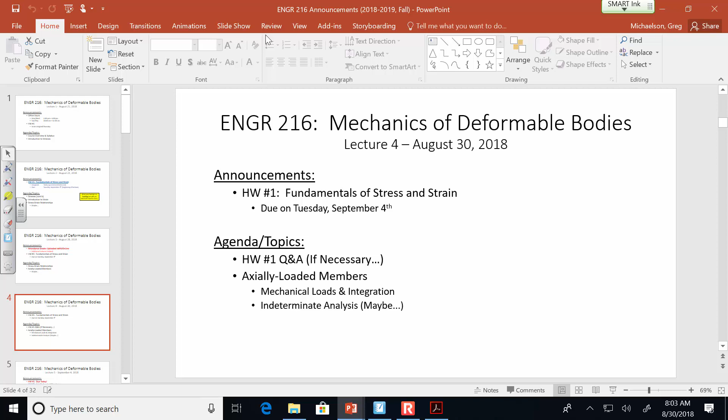So what we're going to do today is begin. We've basically finished our fundamentals in the class. We've got a pretty clear definition, hopefully by now, of what stress is, what strain is, and how they're related. What we're going to do is take those definitions and start to address typical types of problems that we deal with as civil and mechanical engineers. We're going to start with an axially loaded member, take axially loaded members, and just run the gamut with them. So I want to go through some of that theory a little bit.

We start with axially loaded members here because they're the easiest place to begin, since we've pretty much already derived in one way or another all of the formulas necessary to start attacking axial loads.

So what we do is basically say, all right, we start off with Hooke's law. We start off with our fundamental relationship between stress and strain. I already have some definitions for what stress is: stress is force per unit area. That was one of our first definitions of the course. And I know that strain is the change in length over the original length.

So if I have stress equals E times the strain, and I know that stress is P over A, and strain is the change in length over the original length, then I can just do a little bit of algebra and get that delta equals PL over EA. It's that simple—take this equation, multiply both sides by L, divide both sides by E, and there you go. I don't want you to think there's any magic in how I'm getting this relationship.

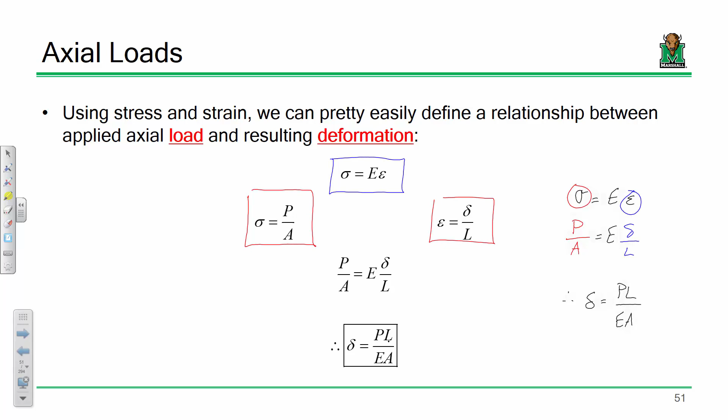So that's basically your four parameters that define how a member is going to deform when subjected to axial load. Now, one thing worth mentioning is that formula is very nice and pretty only if the load or the area is constant. So what if you have a bar that's tapered, a bar where the area changes?

Well, if the area changes, we got to break out the C word—we got to use a little bit of calculus, because we don't have deflection as just a function of some constants. If the area is a function of x, then the deflection is going to change as well. So more often than not, we would need to integrate.

Now, I want to show you something. This is pretty straightforward. All we're doing is looking at an individual element, and saying that individual element can have some load as a function of x, and some area as a function of x. So that's where we have this n of x and this A of x. Then all we're doing is taking that and integrating it over the length.

Now let me show you this equation real quick. What happens if we have a constant load and a constant area? If I have an integral from x equals 0 to x equals L, and I have a constant load—let's call that n of x, let's just call that P—and a constant area, let's call that A, how would I integrate that? Like, what's the integral of 7? Anybody? 7x.

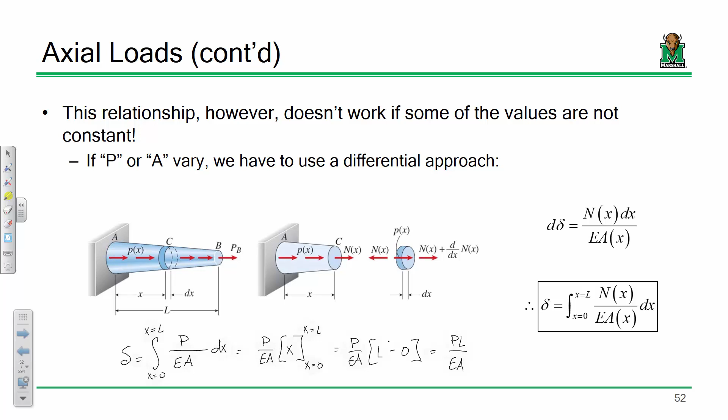All right, now I have an example here, and some of the parameters are a little weird, and that's sort of on purpose. For instance, I've got a bar that's 5,000 feet long. I'm doing that for a reason, because I want you to understand some of the functions we're going to use and how they'll be employed. I think the easiest way to do that is to use some wonky parameters, because I want to provide some reality to it and give you some intuition.

So what I have here is a bar being subjected to an axial load at the tip. Now this bar is 5,000 feet long. How many of you have ever held a piece of rebar that's only a few feet long? Okay, now imagine holding a piece of rebar that's 5,000 feet long. That's pretty heavy, right?

The point I'm making is that it's not only being subjected to a load at the tip, but the bar itself has a significant weight to it. If I have a bar and I just hang it from the ceiling, and it's 5,000 feet long, that bar is being subjected to its own self-weight.

So just under its own self-weight, it's going to want to stretch a little bit. Now, how we determine that, we're going to have to break out some calculus, but I think you'll see where that's coming from. Now, I've got some parameters to throw out at you.

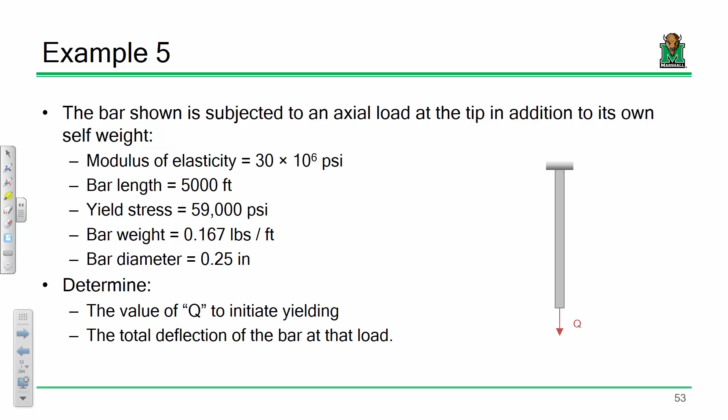All right. Example 5. So the first thing I'm going to do is I'm going to list some system parameters.

I know it's early, but I'm going to get some nice... I am going to list some given values in all seriousness, at the beginning of the problem.

So the first thing that we were given in this problem is a Young's modulus, or modulus of elasticity. So I'm going to say that that was E, and that is 30 times 10 to the 6 PSI. Now we were also given a member length, and that member length was 5,000 feet.

Right off the bat, you should see an issue, because I have pounds per square inch, and I have 5,000 feet. So before I do anything, I'm going to convert this to inches. So how many inches is this? 60,000 inches. So I'm just going to do that right now, before I even start plugging and chugging into anything, just get it into a consistent unit system.

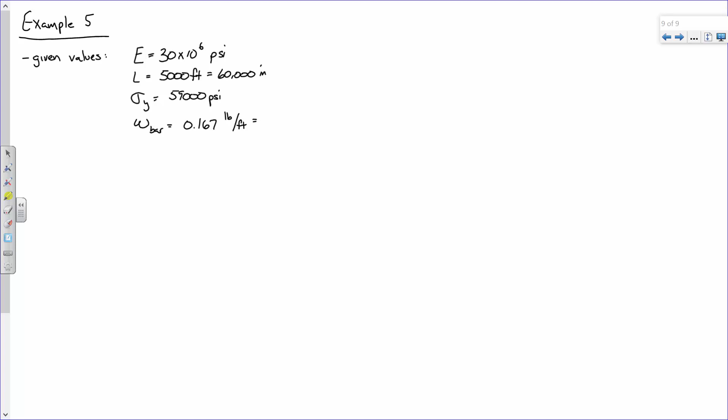It's going to be small, so maybe like 0.014. Just keep it simple for our purposes. There we go. All right, and I have a diameter of the bar of 0.25 inches. Obviously, inches. So far, so good? Now let's look at each of the parts of this problem because I want to figure out what's going on.

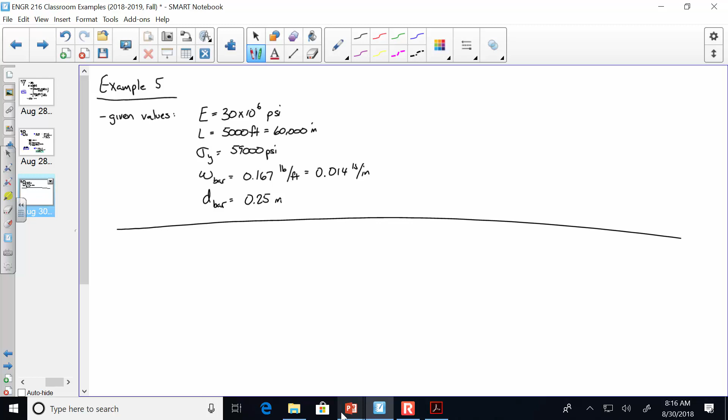The first thing it's asking is the value of Q to initiate yielding. Let's think about that. How do we know when something has yielded? Are we talking about its deflection, its strain? What are we talking about when we think about yielding? We're talking about its stress, right? So when has something yielded? Well, it's yielded when its stress hits this, right? So how do we determine stress? Just simple, basic. The load over the area, right?

Okay, now let's talk about the load over the area. There's going to be two things that generate stress. Q, that load here at the bottom, so force over area, that Q. But there's another load on this bar that's going to generate stress. And what load is that? Its own self-weight. There we go.

Now here's what I want you to think about. How long is this bar? What, 5,000 feet? Okay, now this is what I want you to do. I want you to... this is the best you're going to get. I want you to imagine that you have really weird feet and that you have your feet right under this bar, okay? And in your hand you've got a lightsaber, right?

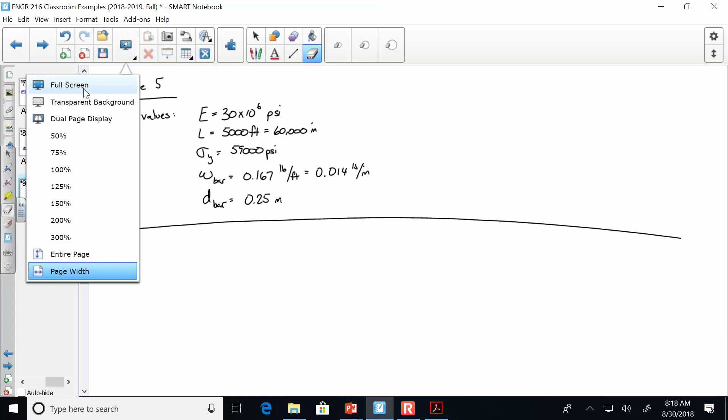I need to erase that travesty. So that was horrible, okay. All right, so I want you to keep that in your mind, but let's also keep in mind we're talking about stresses. Stresses are defined as forces per unit area. What can we go ahead and easily compute right now? The area, right? We have the diameter of the bar, so let's look at part one.

Let me head this: so we'll say load Q to cause yielding. First off, we can compute the area. And this is a circular bar, so how do I compute the area? Somebody else, right back there. We have a circular bar, so how do you compute the area? I know it's 8 o'clock in the morning. Area of a circle. Come on, pi r squared or pi over 4 d squared, right? We were given the diameter of the bar. Is everybody okay with this?

So we have pi over 4 times 0.25 inches squared. And so what does that come out to be? They're like, it's 8 o'clock in the morning and we're in a meat locker, do we really have to break out calculators? Yes, you have to break out calculators. You're engineers, just be attached to the hip. 0.05... let's add one more, like 0.049. All right, do I have a second on that? Anybody else got that? All right, okay.

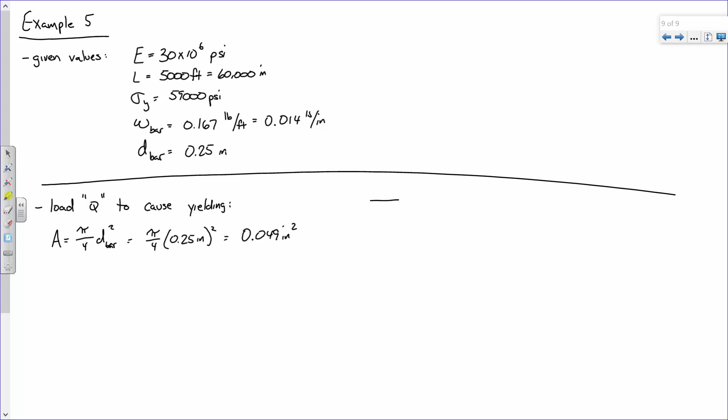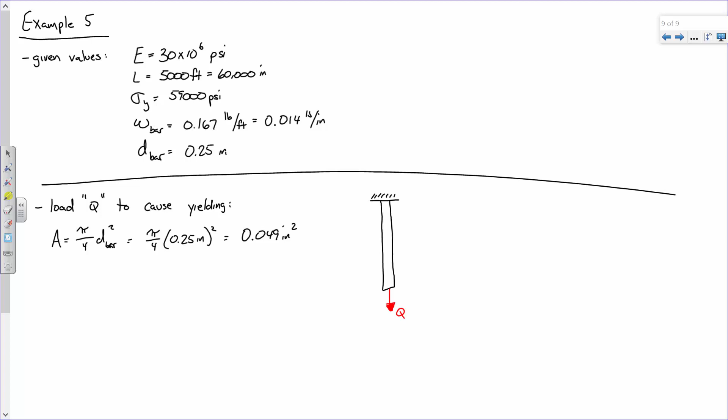All right, now let's talk about that load a little bit. Okay, so here's the bar. And we've got that Q, that Q load here. And the bar is, what is it, like 60,000 inches long. What I'm going to do is I'm going to cut a section using my samurai sword or lightsaber through some random point, through some random point right here. So let me draw that. So I've got this. I've still got my Q.

And here's my cut, all right? And I've cut it through some random distance. So this distance here is X.

Everybody okay with this? Now, this bar weighs—I'm going to use feet because I think it's easier for our discussion—the bar weighs

0.167 pounds per foot, right? So let's say I cut through the bar and that distance is 1 foot. How much does the bar weigh? Let's say that this is 1 foot. How much does that little piece of bar weigh? It's going to hit you on your foot.

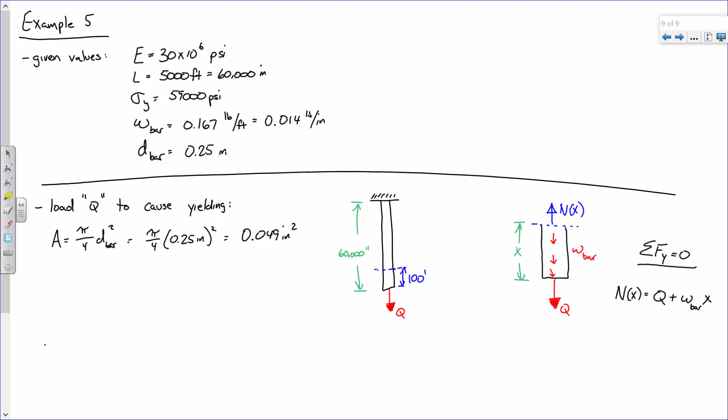So I propose that P max is the load at X equals 60,000 inches. That is Q plus 0.014 pounds per inch times 60,000 inches. And so that's Q plus what?

I'll make y'all do some work this morning. You could also take 0.167 times 5,000, just as long as your units are consistent. That's all that matters. Say it again.

840. Is that what you got? Do I have a second on that? So what you're telling me is that the bar itself weighs 840 pounds.

Now, we don't have a clue what Q is because that's what the problem's asking for. It's saying tell us what Q is so that yielding occurs. Okay, so let's see what that is.

If that is the maximum force in the bar, how do I determine what the maximum stress in the bar is? Well, that's ultimately what we're going to do. What I'm asking is, that is the force. How do I calculate the stress? I take this and do what with it?

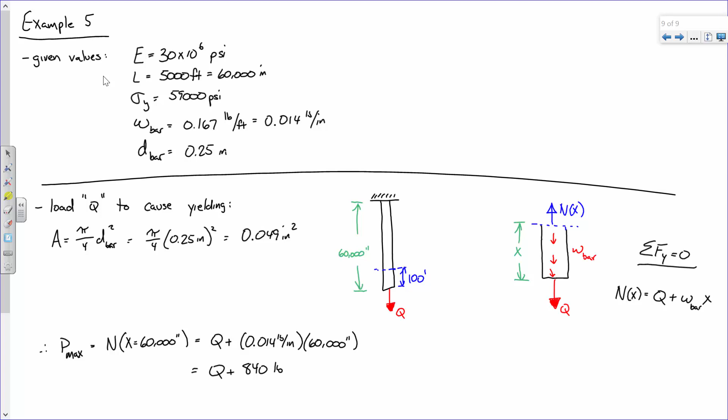There we go, divide it by the area. So if that is the maximum force, the maximum stress is that divided by the area. So Q plus 840 pounds over 0.049 inches squared. Now we do what you said.

We said our goal is to try and figure out what Q is so that yielding occurs. Well, I take that maximum stress, I set it equal to sigma y. So Q plus 840 pounds over 0.049 inches squared, that's got to equal 59,000 psi. So Q plus 840 pounds equals

59,000 psi times 0.049 inches squared. So Q is 59,000 psi times 0.049 inches squared minus 840 pounds.

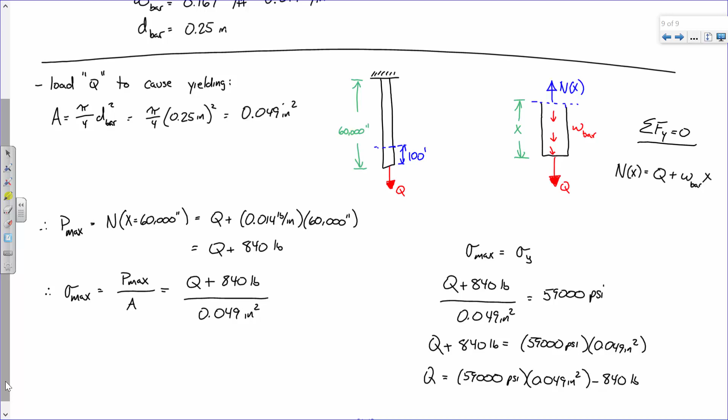First off, do my units work out? Yeah, I got pounds per square inch and inches squared, so everything works out there. What does Q come out to be? 2,051, is that what you said? Do I have a second on that?

All right, so 2,051 pounds. Okay, we'll say that's the answer to part A. So does that make sense? That's how much load is required at the bottom to cause yielding. Anything more than that, this section is going to yield and freely deform.

What do you think? Any questions? All right, so if you're okay with that, now let's look at the second piece.

The second piece is asking for the total deflection of the bar under that load. Now, we would love to be able to use PL over EA, but we can't. What's that reason? Remember, we can use PL over EA if the load is constant and the area is constant. Can we? The load's not constant, the load varies.

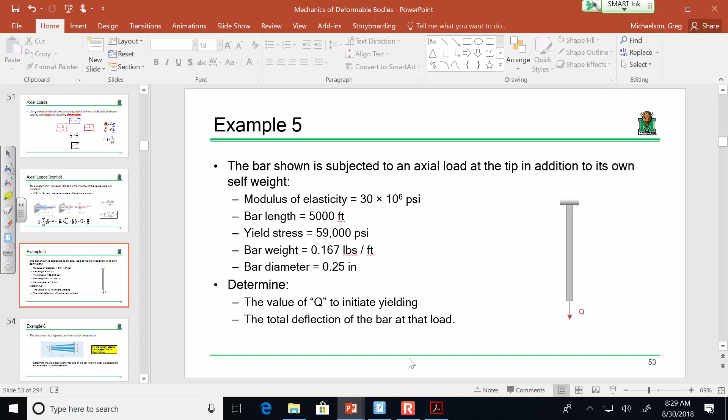So because the load varies, we can't utilize that, so we have to integrate. But fortunately, the integration is pretty simple because we've already done the hard part. The hard part's actually not the integration. The hard part is determining our load. We've already done that, okay?

Here's our load right here, this N of X—this right over here, Q plus W bar X. This was the hard part. Once you've got that, everything else is pretty simple. And I'll show you how that works.

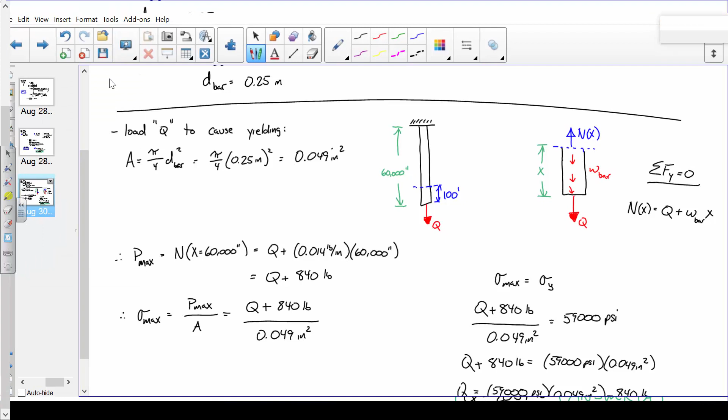So does everybody have all this? Am I good to go on the next panel? All right, okay.

Okay, so the deflection, that's a little lowercase delta, if you're curious. That's an integral from x equals 0 to x equals L of N of X divided by E A of X, dx. Okay, so I'm going to test your Calc 1 skills.

Don't worry, by the way. We do see some calculus in this class, but usually it's incredibly simple. If you know what the derivative of x squared is, you're pretty good.

So let's start filling this in. Now, area is constant, right? So I'm going to factor out the area, and factor out this E value, so 1 over EA. Then we have the integral from x equals 0 to x equals L. And what was in there? It was Q plus W bar x. That was simple, right?

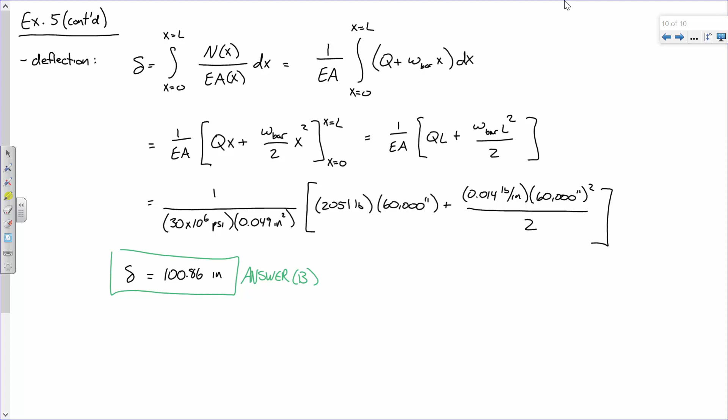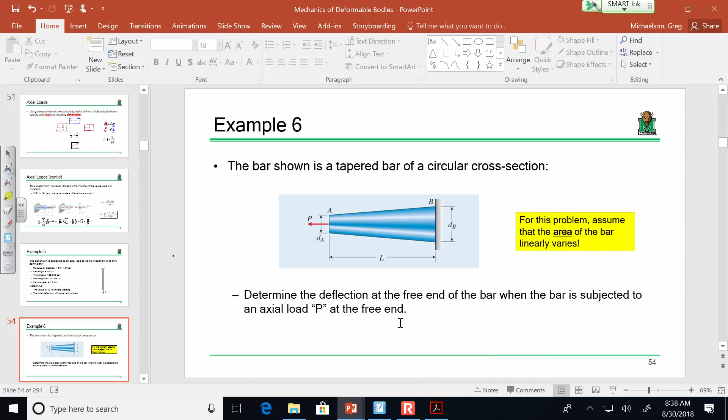We're at 69 degrees in here, so it's starting to warm up. Maybe the room knows that we're talking about thermal expansion later. I'm going to get you all laughing, it's going to happen.

Now, I added a little note to this problem, so if some of you have your slides printed out, you won't see that yellow box, but I did that this morning. This will make some sense as we go through it, so just bear with me.

So I have a bar here. This problem is a little different than the previous one. This bar is tapered, okay? So is the area constant in this problem? No. But is the load constant? Let's see, if I cut a section here, I've got P this way, I've got to have P that way. If I cut a section here, I have the same thing, okay? So far, so good?

Now, that's one glitch we're going to have to deal with in this problem. Another thing we're going to have to deal with is that there are no numbers.

I don't like to do this a lot. Most times I won't ask you to derive anything symbolically. But there are a few instances where it's incredibly necessary and valuable for engineers to have symbolic formulas. One common example is when designing beams. Beams can be subjected to all sorts of different loads and geometries, and depending on that you get different deflections. So it's common for engineers to have a reference of beam deflection equations, here's my load, here's my deflection, and you have to derive those symbolically. So they're quite useful. I don't like doing this just to make your head spin, but I want you to understand there's a reason for it.

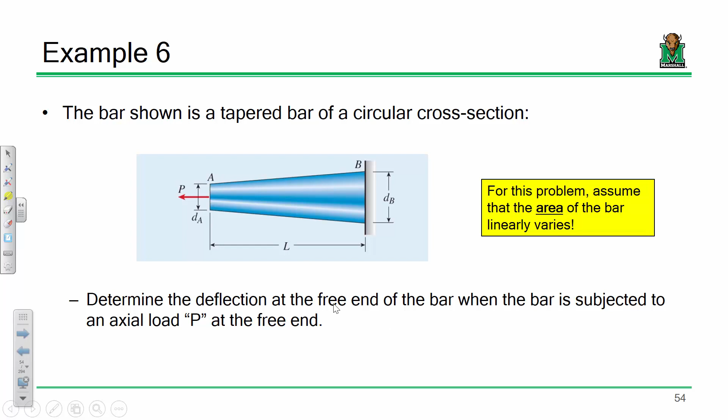Okay, and I'll try to be, I don't want to say verbose, but I want to make sure I'm being clear in my notes. Like I said, in most cases I'm not going to give you a full symbolic problem, I try to avoid that as much as possible. Okay, so let's see, which way was it? Facing that way.

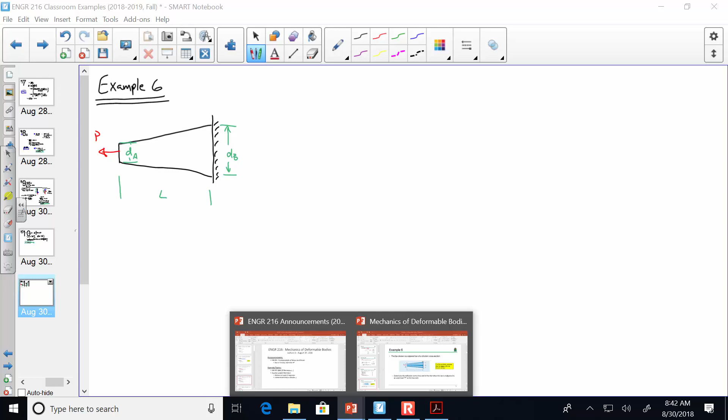Okay, so we've got some load P, and one thing we do know from the problem is that we have a dA, we have a dB, and we know that this is L.

So far, so good? Now, to begin this problem, and this isn't going to be how we ultimately answer it, but I just want to throw some numbers at it so we can have some reality and be a little grounded in our discussion. So let's assume some values.

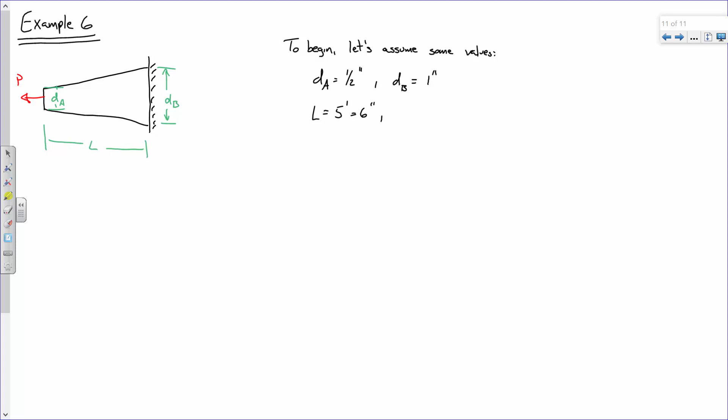I'm going to assume, just for the sake of discussion, that the diameter of A is 1/2 inch and the diameter of B is 1 inch. We'll say this bar is 5 foot long, or 60 inches long. We'll say P is 20 kips, and we'll say E is 10,000 KSI.

Now these are all pretty reasonable assumptions for values for a problem like this. But the main reason I want to do this is because when we start doing some calculus later, some derivation, some integration, I want you to have a very clear understanding as to what is a number and what is a variable. I think the easiest way to do that is to throw some numbers at the problem and see what happens.

So if we've got these diameters, it would be intuitive that we can easily compute the areas at the ends. So the area at A is pi over 4 times dA squared, and the area at B is pi over 4 times dB squared. So if we plug and chug...

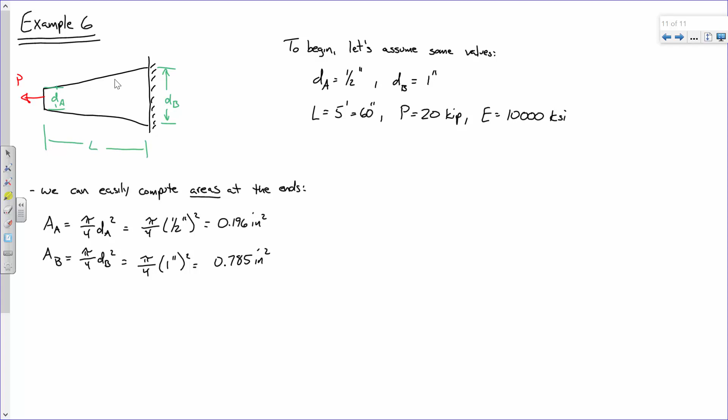Now let's continue. For this problem, we're assuming that the area varies linearly. Keyword linearly, it's a line. What's the equation of a line? Y equals mx plus b, right? Okay, so let's think about that. Now what I'm going to do is define myself a coordinate system.

So this is the area at A, this is the area at B. Now this is a coordinate system, right? So if the coordinates of this point are x equals 0, what are the coordinates of that point? X equals L, or x equals, I don't know, 60 inches or what have you. So I propose that we've got 2 points.

We have the point 0, AA, and we have the point L, AB. Is everybody okay with that? So if you've got that, now I'm not telling you how to determine the equation of a line, you're going to tell me. So if you've got 2 points, I need the equation of a line. Y equals mx plus b. So what's m?

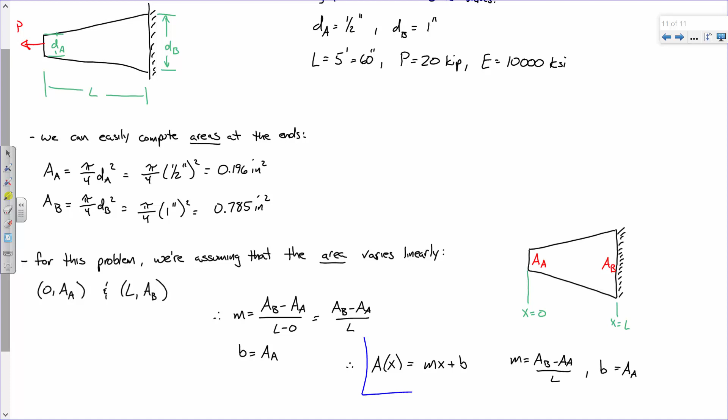What do you think? Are there any questions about that? That's kind of important. Everybody good? All right.

There's that. There's our area. I'm going to put for our load. Can anybody tell me what that's going to be? Not you, somebody else. What is this going to be for our problem? What's our load going to be? Does it vary or is it constant? It's constant, so it's just going to be P, right? There's nothing that varies. Does that make sense to everybody?

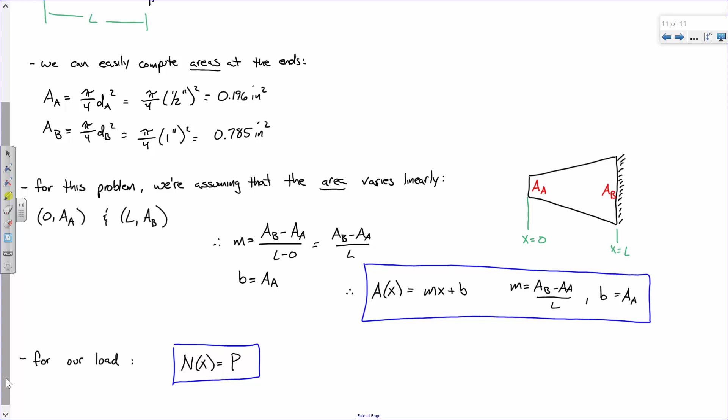Okay. Everybody okay with that? If you're okay with that, then we can start doing some integration. Can I go ahead and skip ahead to the next sheet, or are you all good here? Or do you need me to wait for a second? Good? Okay, all right.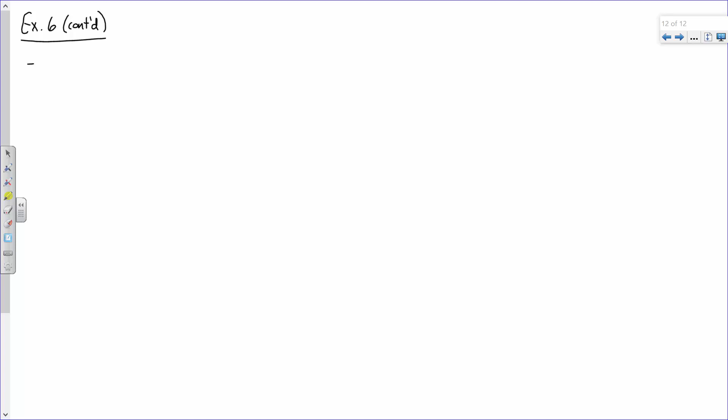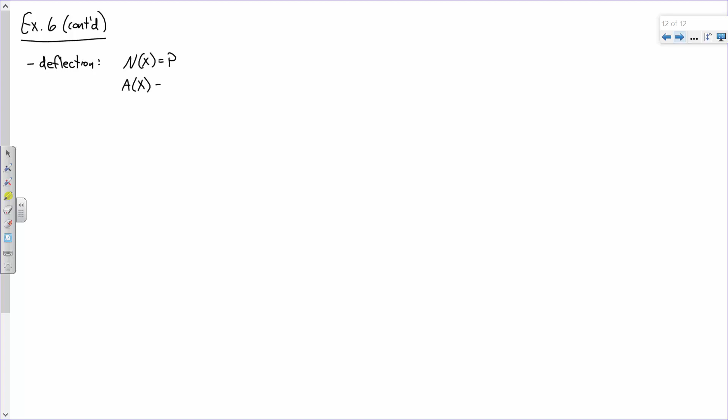So therefore, for our deflection, we've got n of x is P, but a of x is our line, mx plus b. So our deflection, we integrate from x equals 0 to x equals L, n of x over EA of x dx, and just start plugging and chugging. So integral from x equals 0 to x equals L of P over E times mx plus b dx.

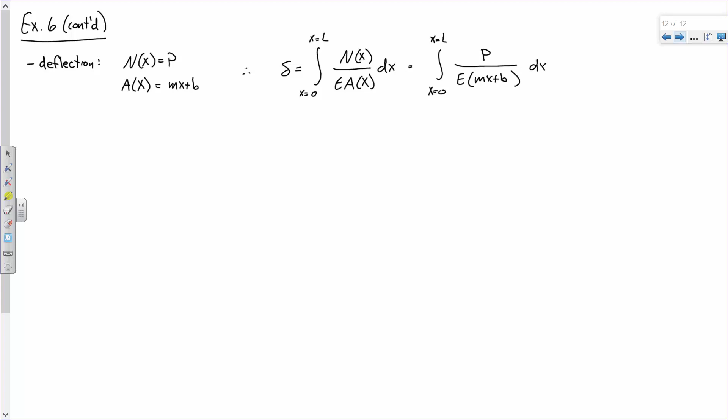So what's a constant? What can I pull out? The P and the E, right? So the P and the E, integral from x equals 0, x equals L, dx over mx plus b.

Does anybody remember how to do that? You've got a natural logarithm in there, that's for sure. What's that? Well, let's do this, let's take it step by step. Let's say u equals mx plus b. So what's du? It's m dx, right?

So why don't we say this: we have P over E, x equals 0, x equals L. The mx plus b, let's call that u. And then the dx, we'll call that du over m, right? So I got an m over here on the outside. Integral of x equals 0, x equals L of du over u.

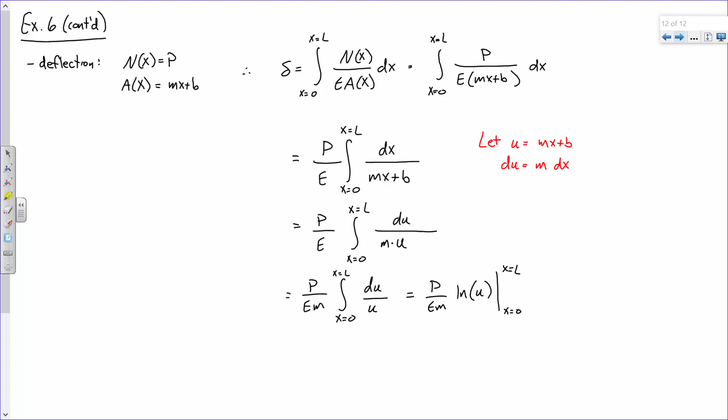And so now that integrates as the natural log of u. Now we still evaluate that from x equals 0 to x equals L. So far so good? All right.

We replace our u with mx plus b, right? Now how does that work? You plug in the top number minus plug in the bottom number, right? So natural log of mL plus b minus natural log of b. Did I do that right?

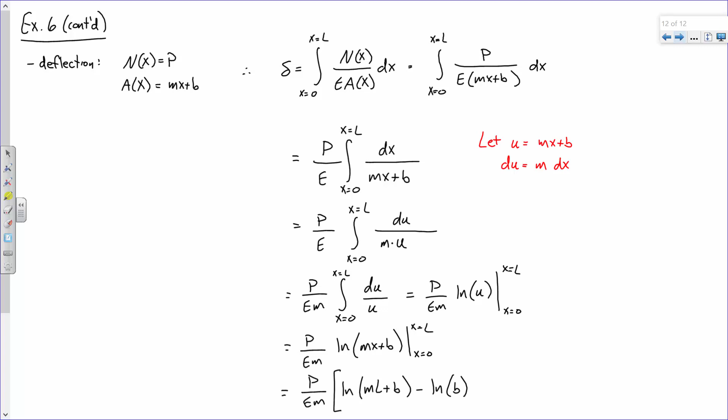All right, and remember, now let's go back to logarithms. If you've got log of a minus log of b, you can turn that into a fraction. So we have P over EM times the natural log of that. Everybody okay with that? So I propose then that our answer is delta equals P over EM natural log of ML plus B over B, and M is that, and B is that.

What I highly suggest that you do is this: remember those numbers I sort of made up at the beginning? If you plug and chug those numbers for this problem, I highly suggest you chug that out and say for our data, you will get a deflection of about 0.282 inches. I highly suggest that you do that just to make sure you're comfortable with this.

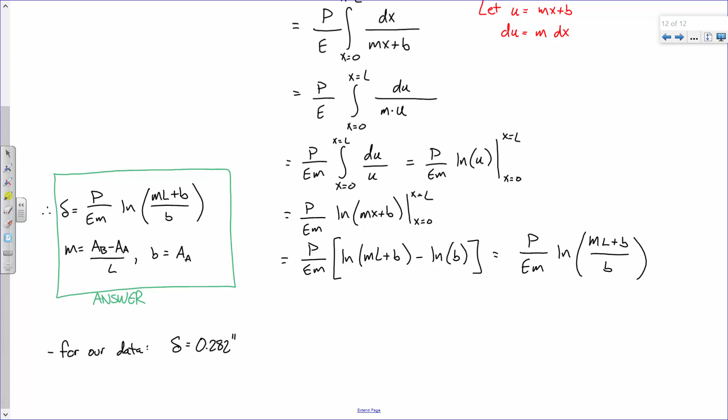All right, don't worry, I'm not going to keep you here too much longer. We've had a pretty heavy day in terms of math, and what I want to do is introduce a concept for next week that ultimately I think is going to be a little more interesting and a little more fun.

A lot less calculus and stuff like that. We're not going to be dealing with much more of that, but the challenge and the understanding is going to pop up. What I want to do is introduce to you the concept of indeterminacy.

Now, if you have me for structural analysis this semester, we've already talked about it in there, but we haven't really dealt with it. We've defined it and taught you how to identify whether a structure is determinate or not, but that's it. We won't handle statically indeterminate structures until later. For our purposes in this class, though, we actually are going to start handling indeterminate structures right now.

Although it's going to be a little more localized, kind of on a member-by-member basis, whereas for you civils in structural analysis, we'll be looking at indeterminate systems, so it's going to be a bigger deal in there. But the way I want to introduce it is I want to look at this structure.

This is a 2-bar truss. What are 2 ways you can solve a truss? I know you all remember this, right? We have method of joints and method of sections. Let's talk about the method of joints. Let's say I'm utilizing method of joints to solve this joint.

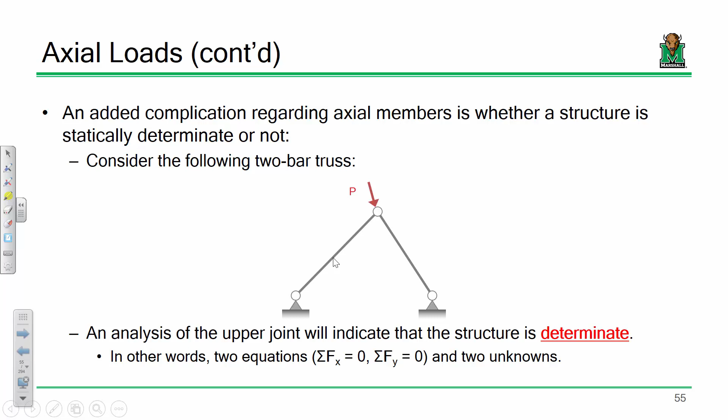Now, a compatibility relationship is basically saying that when it's all said and done, once you apply this force to this structure, it's going to deform. We're in mechanics of deformable bodies because we recognize that everything is deformable. When you apply a load to something, it will respond by deforming. Compatibility relationships basically say that once you apply this load, this point right here will deform.

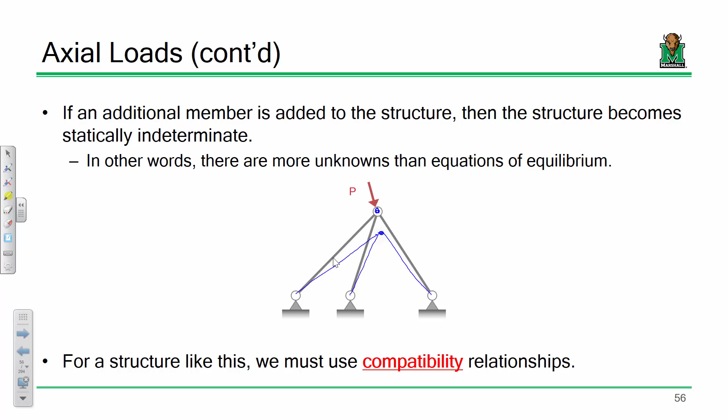Now, geometrically that's a little tough on this problem, but on this one it's pretty simple. I'm using this example just for discussion purposes. We're not going to do any math today, so you can all put the calculators away. Oh, thank God, we don't want to do any math.

We've got dynamics in a little bit, so we're having to gear up for that. I know things.

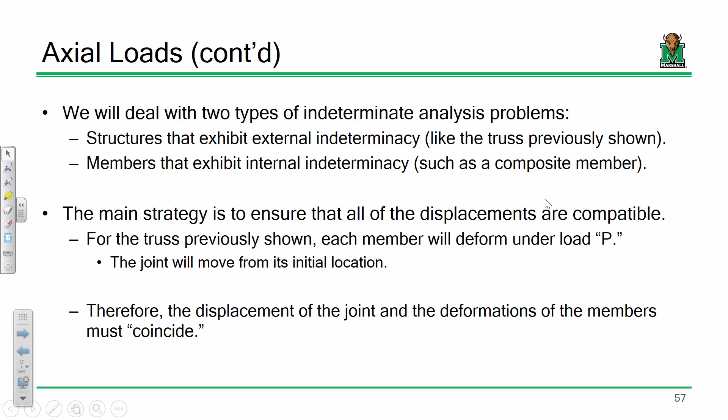There are two types of indeterminate problems we typically deal with in these scenarios. One is internal indeterminacy. An internally indeterminate structure is like a composite member, where we could solve for reactions all day long, but the indeterminacy arises from the composition of the member itself. This member is comprised of two different materials, aluminum and brass, and that's where the indeterminacy comes into play, and that's internal.

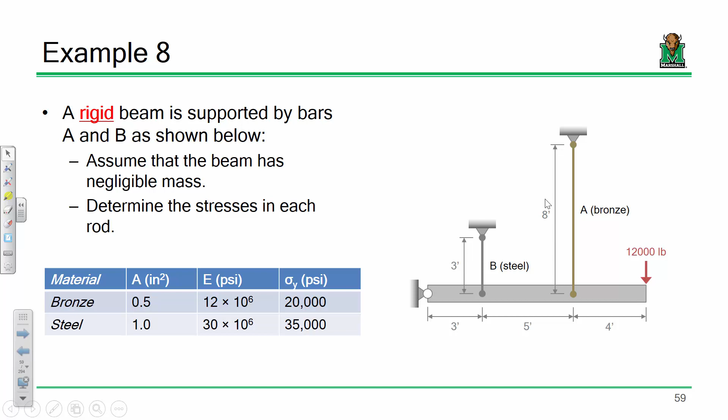In this scenario we look at deflections as well, but a little differently. We ask ourselves, what's the deflection right here? And what would the deflection be right here? If this is a support resisting those loads, what's the deflection? How much does this point move? Well, not if it's restricted. That's the point. What's the deflection?

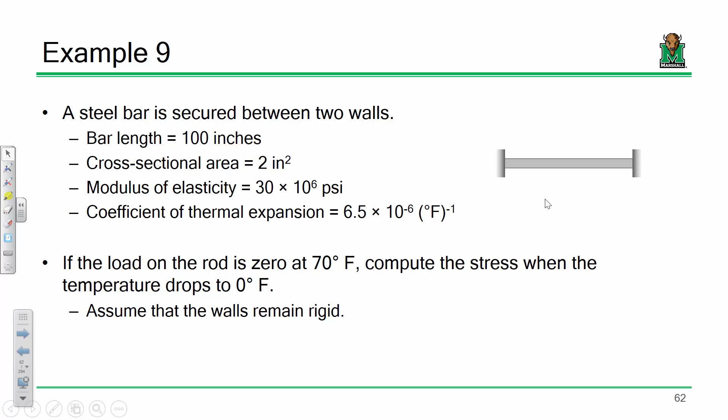It's zero. So for internally indeterminate structures like this, we'll recognize that they both deform the same amount. But here's the easiest way to look at it: if I take this column and press load on it, would you agree the column's going to get shorter? It's going to squish, right? But I'm also saying that this is pushing back, so this point doesn't deflect at all. Does that make sense?

So internally indeterminate structures use internal compatibility, but for external indeterminacy, we say those external supports don't deflect at all. We use that relationship between loads and deflections to determine the forces and stresses in each of those components. Does that make sense? Everybody okay with that?